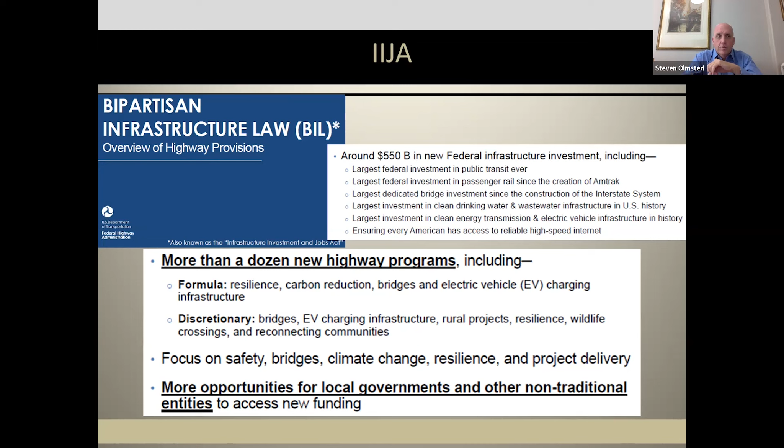I wanted to list some of the sustainable and resilience aspects - you see carbon reduction, EV charging, rural projects, wildlife crossings. There's a whole host of those natural built environment connection points that are applicable more or less depending on where you sit, whether urban, tribal, or rural. I thought this was a pretty valuable slide. Again, you'll have access to these slides, but I tried to gather up a very arcane federal funding term: apportioned.

If you really want to look good at a political meeting, you might want to learn the term apportioned - it throws people, they're not always sure what that means, but generally that's just how it's allocated. I wanted to highlight some things identified as opportune. We have a big interest in the bridge program formula and where resilience connects to our bridge program. Not every municipality has a bridge issue, but many have probably at least a singular bridge that is older and quite expensive. How do you engage maybe some resilience funding based on some of your largest infrastructures that you may not visit but every 25, 50, or 100 years?

That gives you a sampling of that additional 500 billion plus in new funding. Then we have a crosswalk for participation - it's not all encompassing, but it lays out where different individuals can participate. So let me get down a little bit more into the specifics.

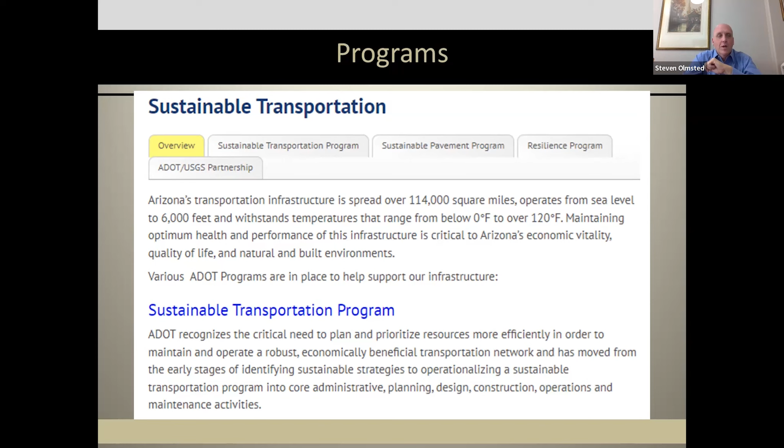I'll move a little more quickly now that we've left the details of protect. You can Google anything you want, ADOT sustainability, ADOT resilience. I'm not saying these are ranked in any particular order. We're keeping our website updated. I must admit I'm behind, so we don't always have the latest and greatest, but there's a ton of information on there that we've done over the last 4 or 5 years.

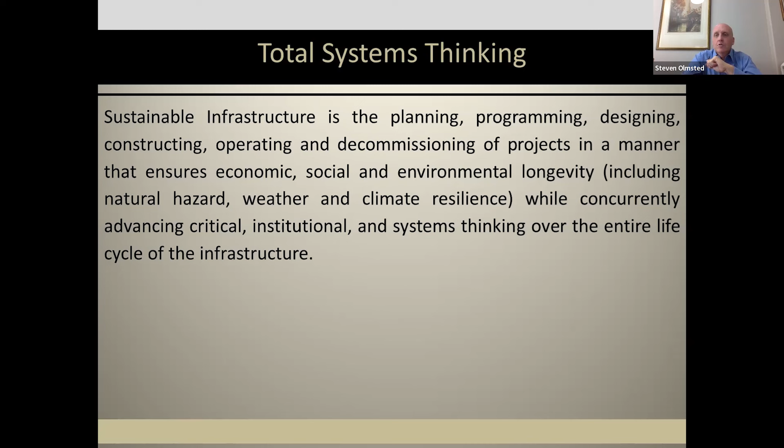When we talk about protect, sustainability, resilience, formula, discretionary, whether water, wastewater, or surface transportation, no matter what it is, it became apparent to me that we needed to go even farther. We're fortunate that we matured a bit, so we look at it from total systems thinking, looking at our infrastructure in total. That's kind of self-explanatory. We have a pretty overarching, and fortunately somewhat advanced, view on incorporating sustainability, resilience, equity, traditional environmental compliance, and a lot of these different things into total systems thinking.

So I wanted to share that total systems thinking is also where ADOT, whether we're talking resilience or protect funding, applies when we look at how to screen and prioritize protect funding. I thought it would be fair to communicate that one of the ways we do screening, one of the responsibilities I have in identifying what gets done, what gets prioritized, how we consider things, is through that total systems thinking.

And it is from, whether it's rural, urban, whether it's tribal, whether it's equity-based, whether it's environmental justice-based, it's fairly wide-reaching, and it's going to take us a while. Just know that we go through that screening process, and who gets what done is very important to us, making sure it's a very balanced approach.

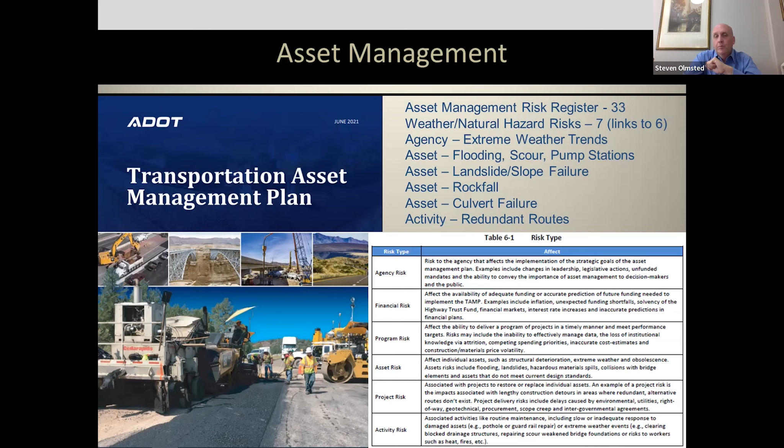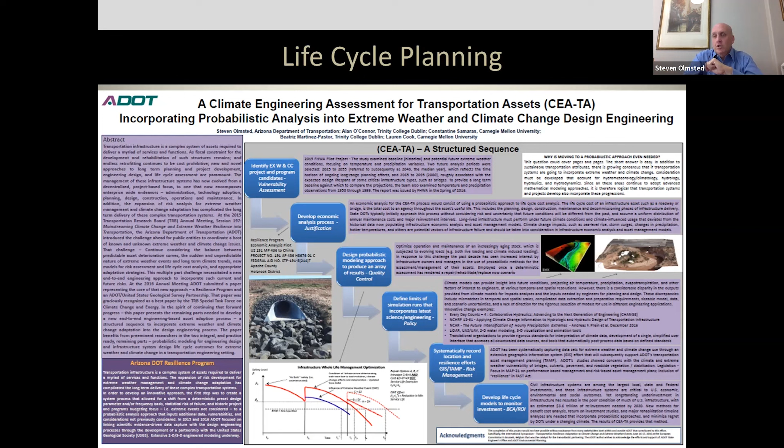Again, don't want to spend a lot of time on these things, I just wanted to supply everybody with a good data set from the slide deck. Everything we do is focused from an asset management standpoint, predominantly by requirement for state DOTs to inventory the health of their system. So it was a very natural place in which to leverage natural hazard through overall system asset management. Impossible to read the slide, but I wanted you to know that we have developed an end-to-end engineering process from adaptation through planning, through qualitative and quantitative risk analysis, down through design engineering and construction to incorporate weather and climate change.

I wanted to talk a little bit briefly on the mitigation side, right? We talk about greenhouse gas emissions, carbon reduction. Okay, so these are just terms. I don't think anybody's going to get hurt by being aware that there is a labyrinth of carbon reduction and greenhouse gas emissions calculations and inventorying underway in surface transportation as well. And a lot of this is triggered through the IIJA. It's not specific to PROTECT. In this instance, these are a little bit more climate change, carbon reduction based. But I did want to make everybody aware that there's an entire thread on the mitigation side of greenhouse gas emissions and carbon reduction underway at ADOT.

In this particular effort, we're doing quite a bit of advanced research work on our pavement assets. Another thing that's underway - I think some of the local municipalities and more progressive states around the country are far ahead of where Arizona is - but we are motivated to participate in green public procurement. Again, not necessarily indicative directly to PROTECT, but overarching under IIJA of a lot of new efforts underway that all end up being intertwined. And I think it's in the best interest from an educational standpoint for a lot of people just to be aware of where these things trigger and participate.

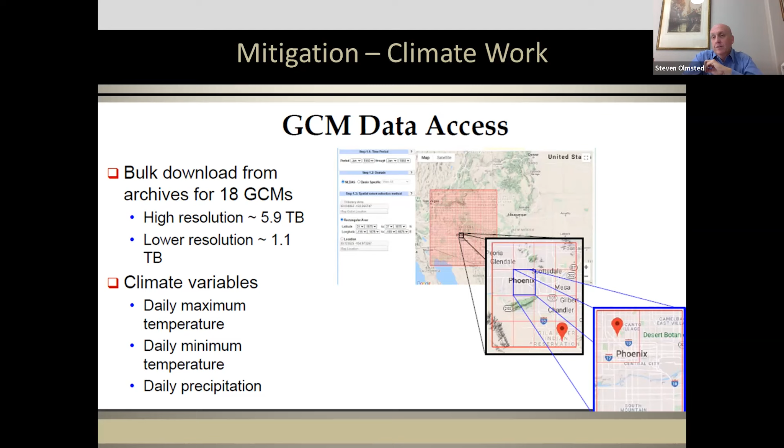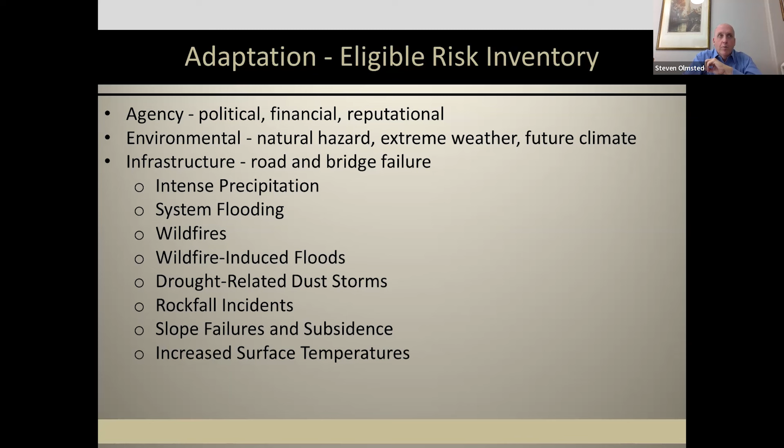Again, we have a program definition for resilience. You can see it on the internet, you'll have it in the slide deck. And then just looking at a risk effort overall on the key areas that we look at at ADOT - this is just a small sample, but it's our main larger categories. Again, we oversee 30,000 maintenance lane miles, 5,000 bridges, port of entries, border with Mexico, and our infrastructure operates from sea level to about 6,000 feet. So there's a lot to consider there.

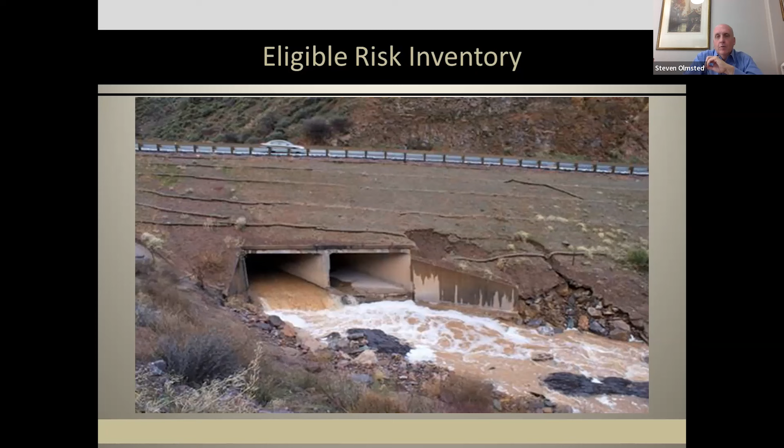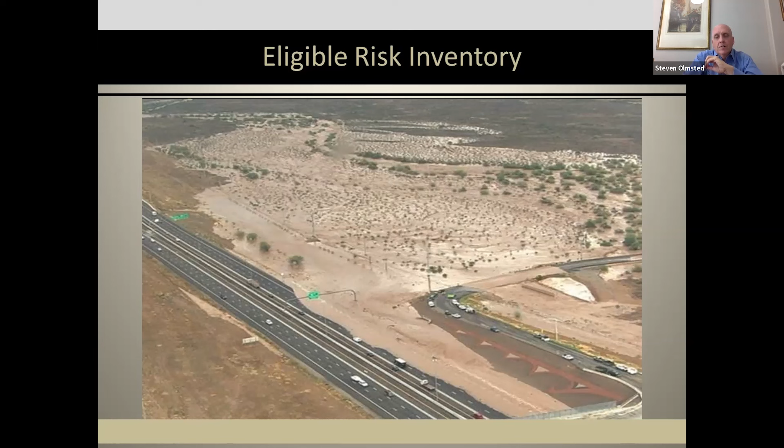And I'm just going to run through that collective, that kind of death by 1,000 cuts. We don't necessarily have the multi-billion-dollar hurricanes, but we have dozens and dozens of $1, $5, $10, $20 million impacts a year to our system. So that's wildfire - you'll see here, this is slope degradation, where the slope is degrading underneath the roadway. This is I-17, this is a kind of interconnectedness overrun from the county road out onto I-17 as you head toward Anthem. This is US 89 - this was a geomorphologic deterioration in the roadway that created a landslide.

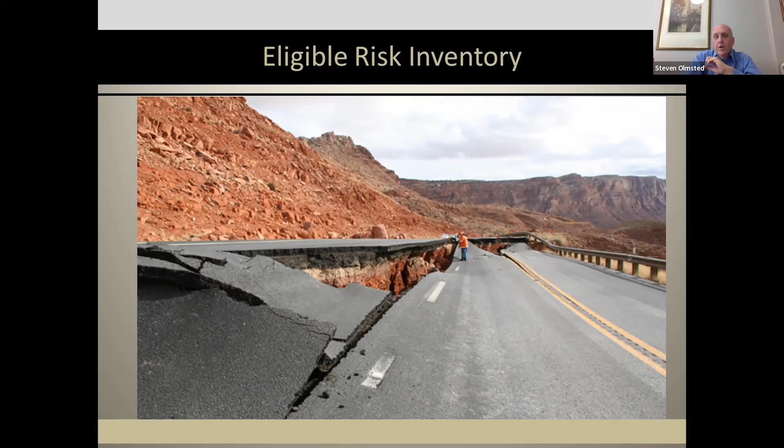This one is one of my favorites. I will spend 15 seconds talking about this one.

We spent about $500,000 on the structure to the left. It was a drainage structure, and it flooded again and caused erosion around the structure. So we spent an additional $1.5 million enhancing that structure with wing walls and fortified concrete. And by the time we had the fourth flood, the water decided not even to use the structure.

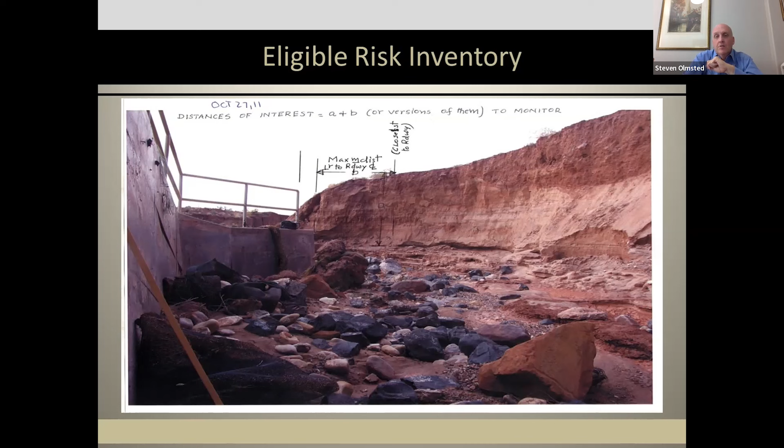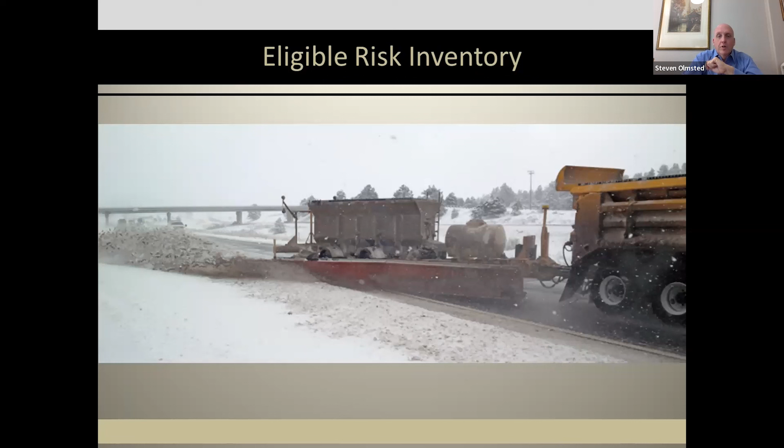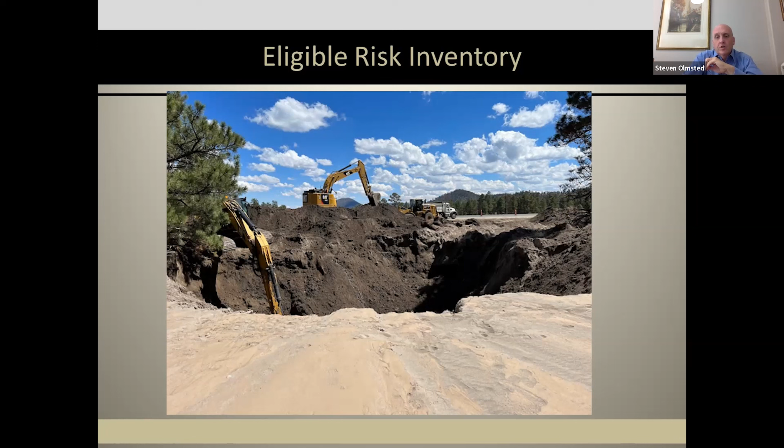Those of you that like skiing or snowboarding know we have snow, dust storms, flooding, and a lot of soft soils, especially in the northern climates, where we have to dig out quite a bit of earth to get out of the subsidence zone.

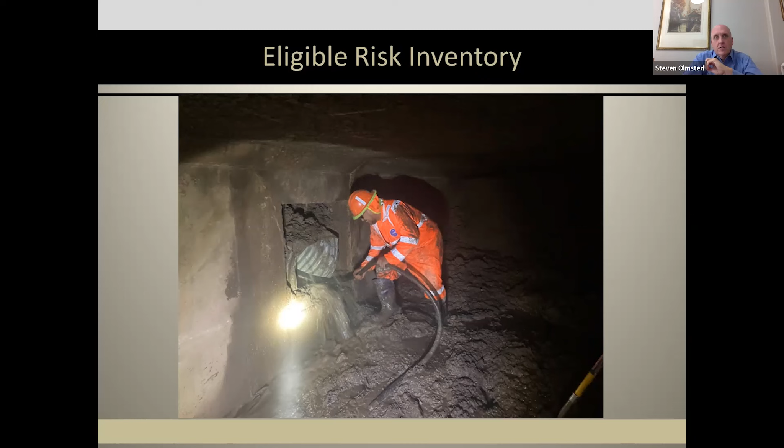Flooding. And this is just a great picture of one of our incredibly hardworking crews in the middle of the night. They're actually inside a concrete box culvert trying to clear out a drainage structure to make sure the roadway gets drained by morning. So it's intensive. I don't want to underestimate the maintenance and operations side of resilience as well.

And a little more flooding. So I'm going to give 2 quick real examples because I want to get to the last slide. These aren't Protect funded, because Protect funding is very new, but I wanted to give 2 examples of efforts from a program standpoint that we were able to get done with just dedicated highway funds, which was a tough go to get justified in the beginning.

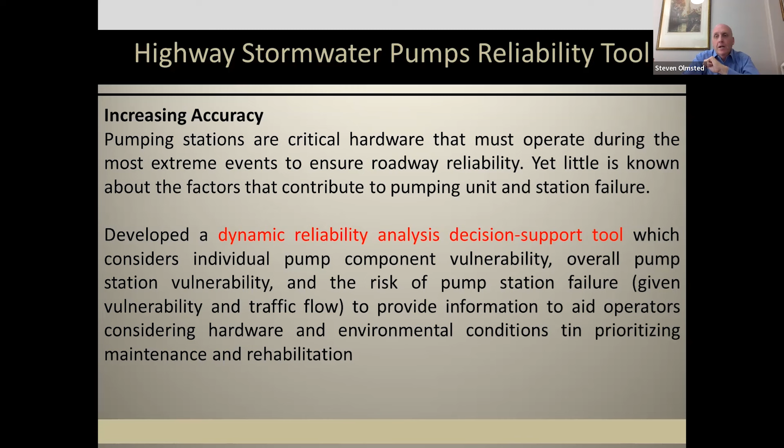But we took a look at all our Maricopa County area pumps relative to most of the state routes and I-10 that you drive every day or avoid. There's the pump system itself, and we developed a web-based tool to incorporate real-time data fed from those pumps, overlaying it not just with historical precipitation data, but also with what small zonal areas were going to look like relative to climate change.

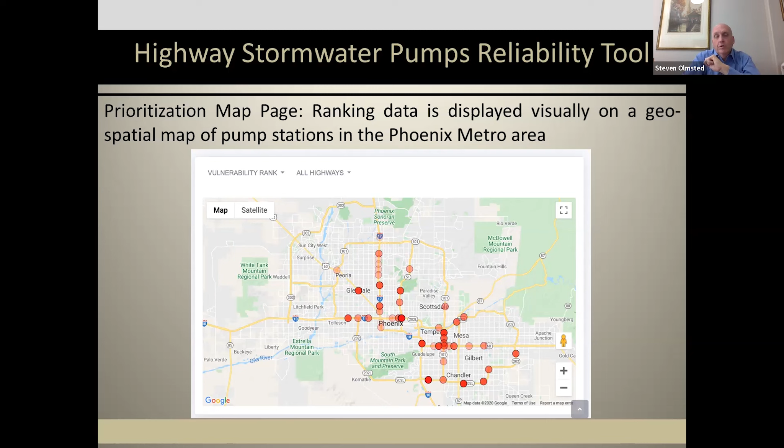I don't want to overwhelm anybody that's completely afraid of math. Those of you that love math will know who you are, that we really are doing here, this is the tough part. So how do you project the future? That's an ongoing conversation on the evolution of math, science, GIS, climate data engineering, and the such. But I did want to pass along that at ADOT, we do a lot of probability work to begin to frame the conversation of risk.

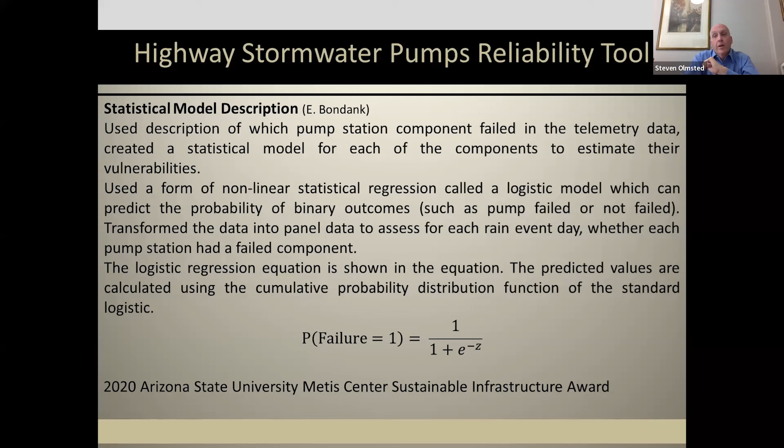So I'll leave it at that, but I just wanted to put forward that using statistical modeling to inform leadership, maybe in your case a mayor or council, you can do deep analysis but then move it down into easy talking points as well.

We were fortunate that this last example was highlighted in a report to Congress recently, and it was really looking at how you consider some of these natural hazards aspects into project development.

We realized through modeling that this bridge, a very important rural state route, was susceptible to overtopping at the 50-year event. For those of you not as adept at hydrology and hydraulics, the 50-year storm is rare, but it is generally what we design a lot of our infrastructure for. The idea that a reasonably probable 50-year event happening and rendering this location incapacitated was not really acceptable.

So those are some of the things we looked at: hydrology, hydraulic scour. I won't mire down into that for those less interested, but it gives you the wide sweeping idea of how we kind of synthesize.

And if we're talking about protect funds, this is a water instance, some of you may be looking at other types of instances, whether it's heat or snow or whatever it might be, but just the different components that go into some of that probability analysis.

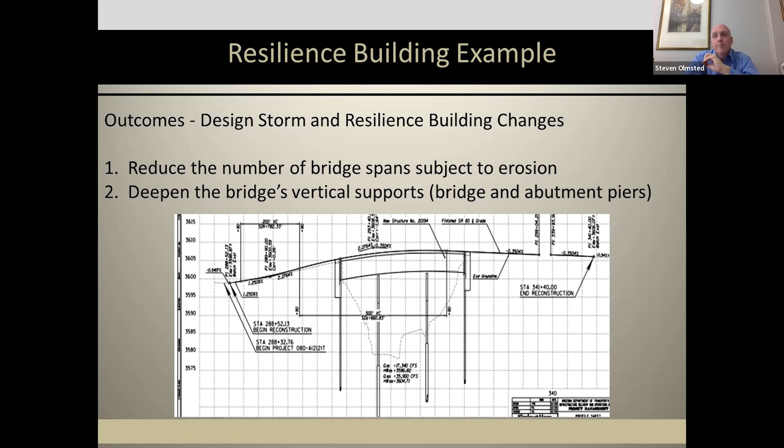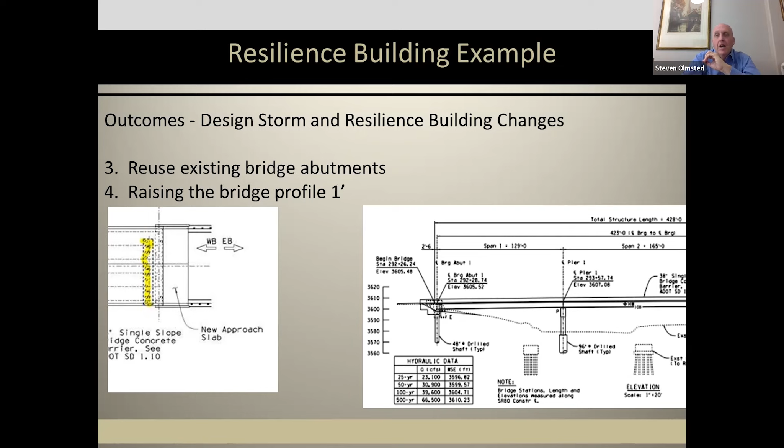We went deeper on the vertical supports, which are the black lines that go straight down to the bottom of the slide. We went about 15% deeper on the drilled shafts. We decided to leave the bridge abutments in place and also add new supports, to kind of make it easy, double the width of the side supports. And then we actually decided to raise the bridge a foot.

And what's the list of things that I, Steve, really had to consider over the last decade as we developed these things? I mentioned earlier the science and engineering side, making sure there was some comprehensive capacity within your operations to even look at the complexity of doing resilience building. But I did want to list some other things. Again, they're in no particular order, but I think they're pretty self-explanatory.

Near-term ambition, right? Enthusiasm versus procrastination. And often that procrastination can be, right, should we adapt? Should we mitigate? Should it be a mix? Should we wait and see?

Again, I've just been talking about the natural hazard focus. Many of us are on different continuums of the climate topic, right, whether you're from a more conservative region in the state or progressive or whatever. Where's that orderly and disorderly policy and discussion development on climate? That's the horizontal piece. I don't think there's a problem with us needing to adapt to extremes, but I think ultimately the long-term view of these things can mire down with different views.